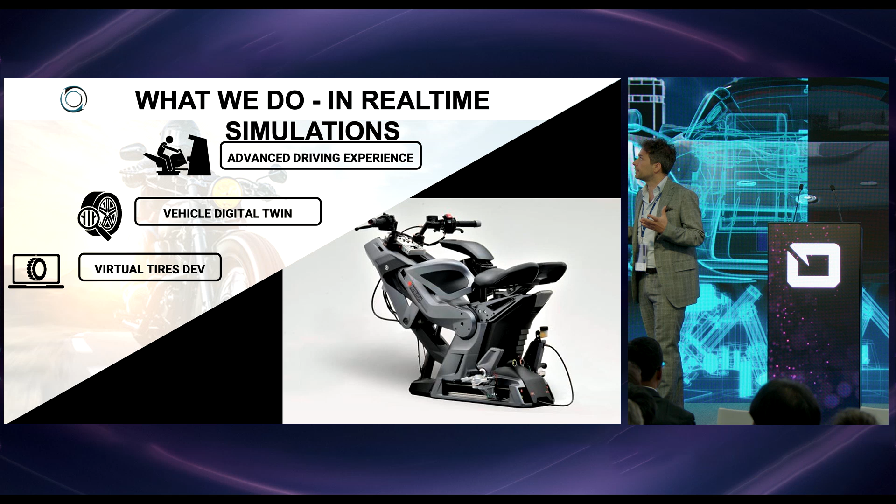We work a lot with this kind of advanced driving experience, working on the vehicle and the tire, in particular digital twin and virtual tire development. And we are really deeply involved in motorsport, where we work on tire analysis to optimize strategies and to identify the optimal temperature and wear ranges in which to optimize the tires.

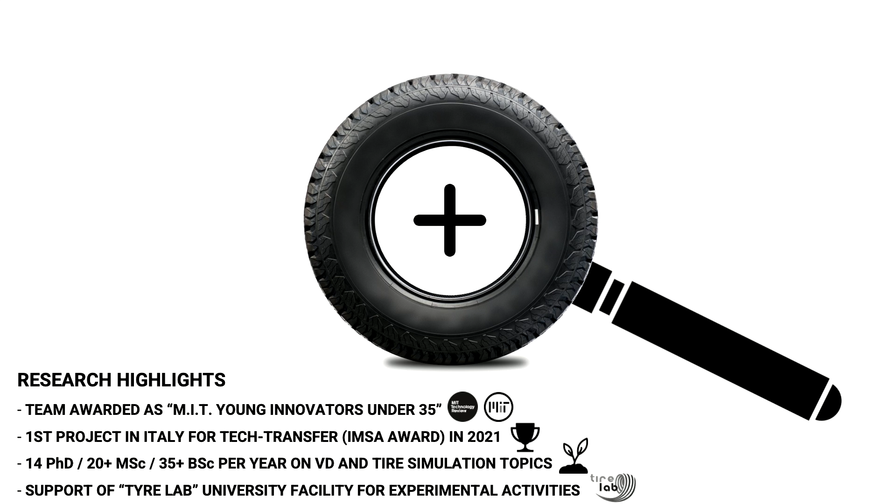Some very quick highlights on the group. We were awarded as Innovators Under 35 - I'm not anymore under 35, but our group is averagely 31 years old. We were awarded as the first project in Italy for tech transfer, and we currently have 14 PhD students in the vehicle dynamics group. We carry out more than 20 master theses and 35 bachelor theses every year on pioneering projects, and we have the support of our facility, which we call the Tire Lab at our university.

The company Megaride was born in 2016. We were awarded Tire Technology of the Year and Vehicle Dynamics Development of the Year by Tire Technology International and Vehicle Dynamics International. Our team is growing, we're about 45, and we became a sort of tech holding group because there was first of all Megaride, and now we have four spin-off companies which converged inside the Megaride holding group.

We currently work with half of the Formula One teams, with 2 MotoGP, Moto2, and Superbike, so we are currently involved in the motorcycle environment. This presentation will be on a project we had with one of the teams we worked with in MotoGP. We had an exclusivity with Ducati Corse several years ago, and we developed the things I'm going to introduce you today, which were evolved further in the last years.

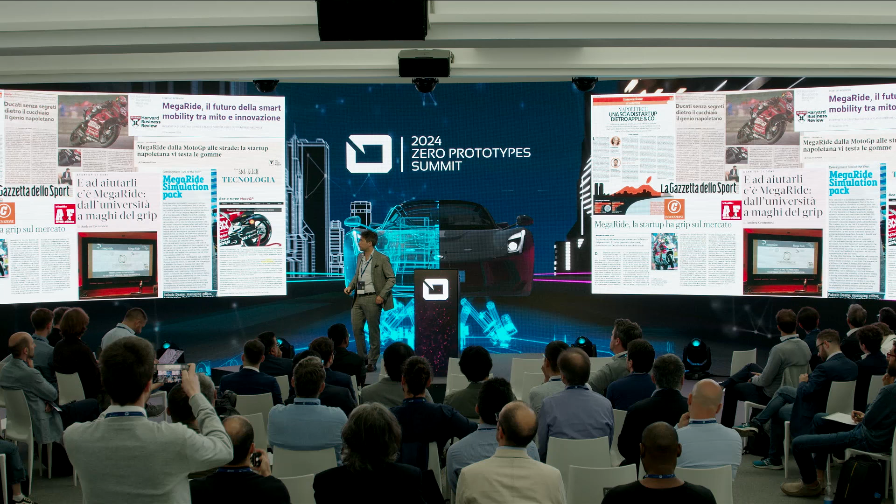Why are we here today? Because I would like to talk to you about what we do with our vehicle dynamics group in the two-wheeled vehicles field, regarding multi-physical models concerning ride, comfort, handling, and tire-road interaction phenomena, and mainly on the identification of the parameters.

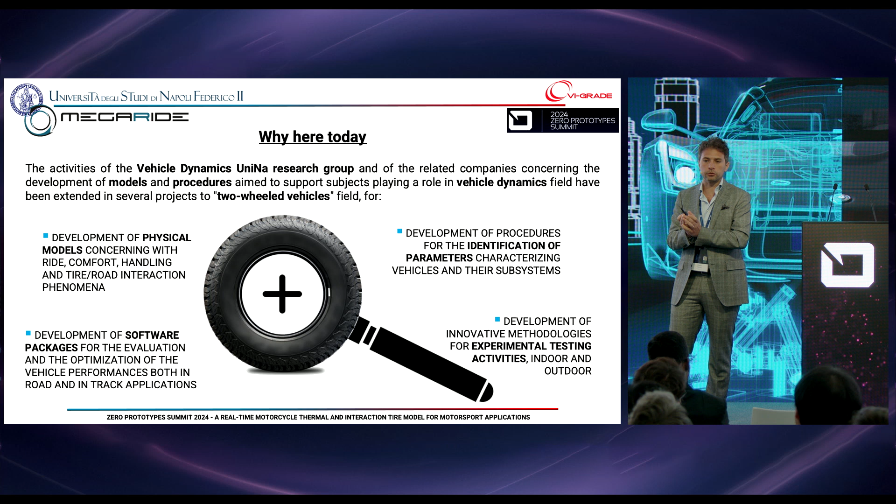We don't just develop the models, but we develop the procedures to identify the parameters of these models, which is very important, mainly in motorsport, because usually the tire manufacturers don't like it much when you cut their tires, so we need to find a way to get that kind of parameters.

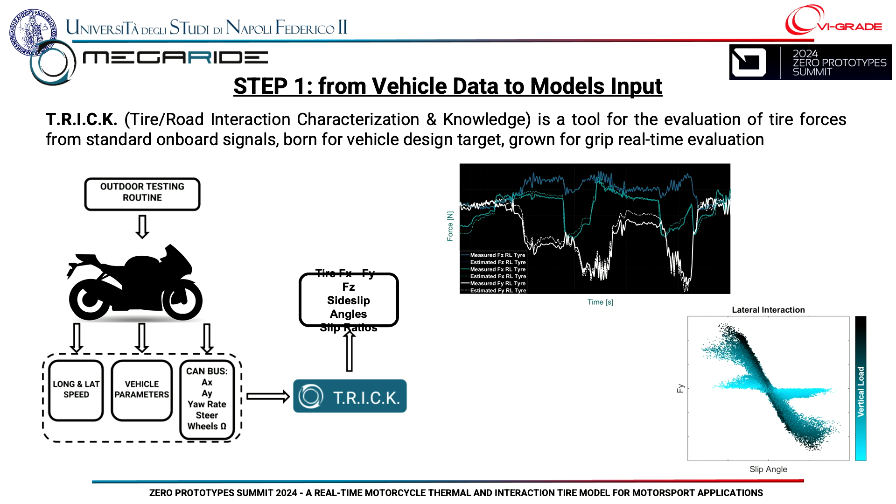First step, we need to get the input for the models from the motorcycle in some way. We developed mainly for cars, but currently also for bikes, a procedure we call TRICK, which means Tire Road Interaction Characterization and Knowledge - taking the data from the vehicle as a sort of moving lab. So we take specifically an outdoor testing routine.

We acquire the longitudinal and lateral speed. Of course, we need some basic vehicle parameters of the bike, and from the CAN bus or any other kind of acquisition system, the longitudinal and lateral acceleration, the yaw rate, the steering angle, and the wheel's angular speed. After that, we're able to process the X, Y, and Z tire road interaction forces, the side slip angle, and the slip ratios of the bike.

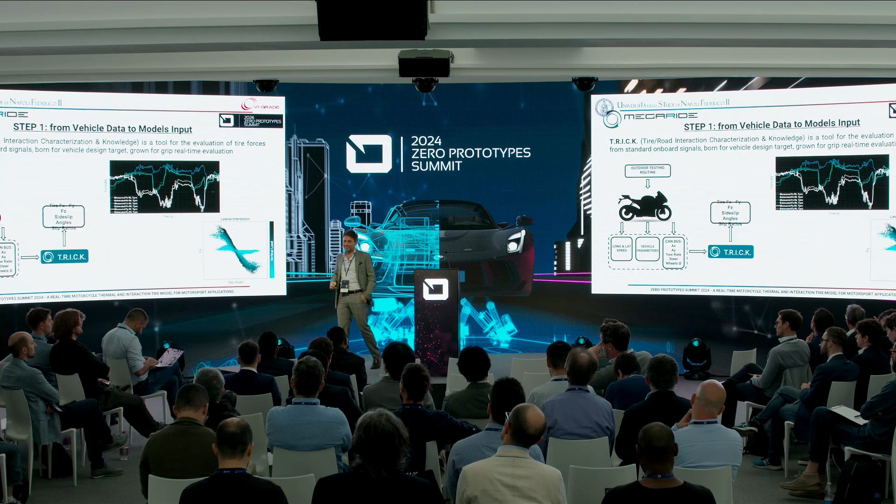In this step, we have the possibility to get the data from the vehicle, process them through this specific procedure, and get the information that is the input for our thermal model. In particular, the model uses the tire tangential forces, vertical forces, slip angle, slip ratio, camber angle, and wheel speed.

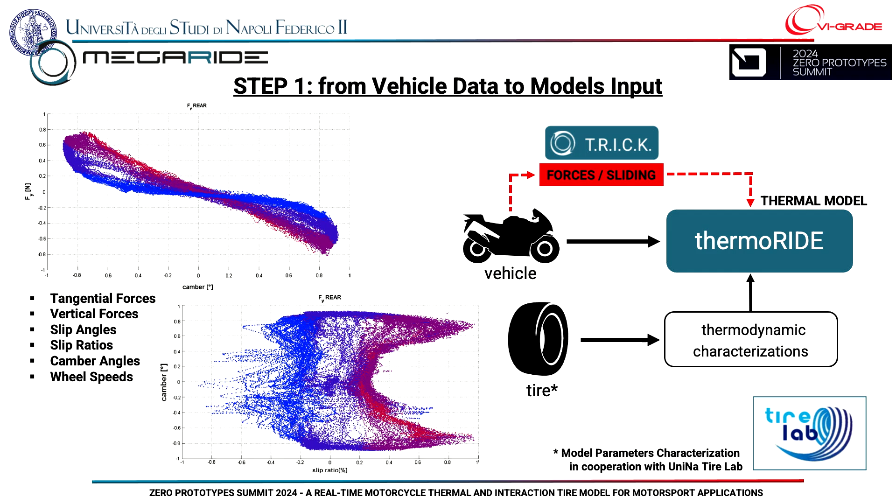These are the basics. How do we do that, and what's the target? We want a tire thermal model, first of all, because we want to have available the thermal info on the inner layer of the tire, which is not usually measurable.

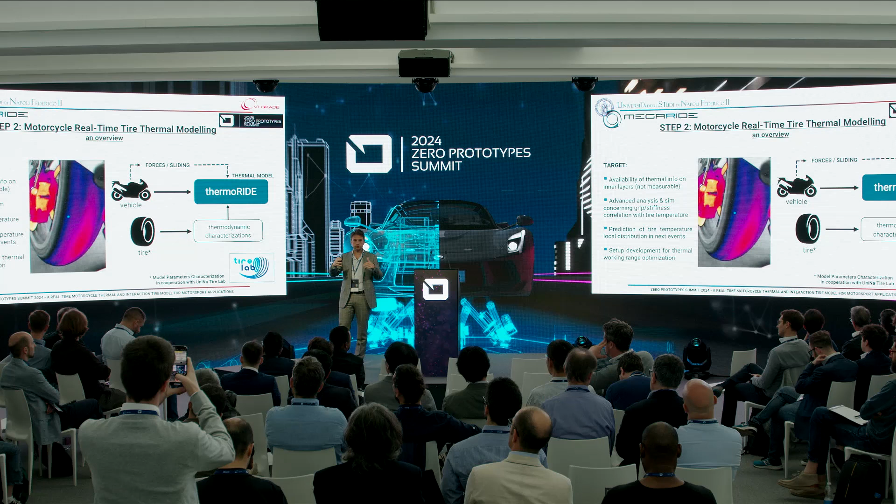We want advanced analysis and simulation concerning the relationship between grip and stiffness with temperature. We want to predict the tire temperature local distribution in the motorsport events we are going to prepare, and we want to develop the proper setup of the bike with respect to thermal and wear working range optimization. How is the model structured? Step 2.

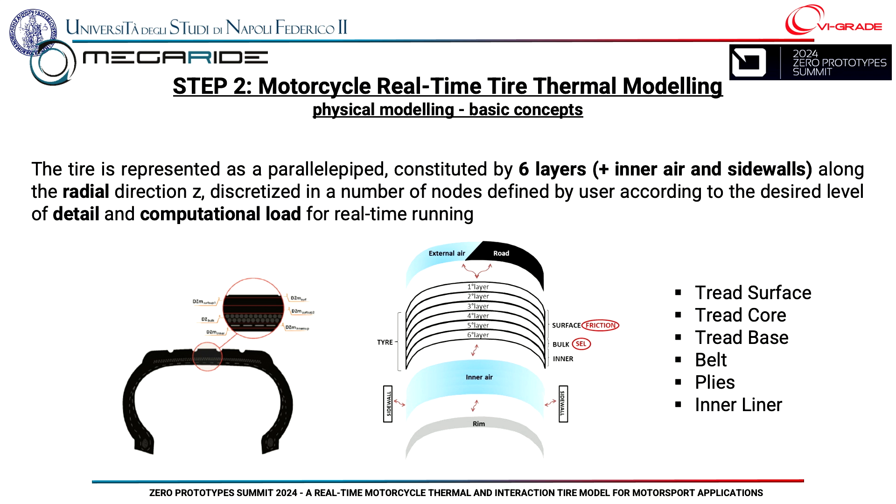The model basically takes into account about 6 different layers: tread surface, tread core, tread base, the belt, the plies, the inner liner. We also have a model which takes into account the inner layer, inner air dynamics, and the sidewall dynamics.

Everything is conceived to be hard real time. Everything I'm talking to you about works in real time. It's up to 16 different ribs in lateral direction, because working with MotoGP, we go up to 65 camber angles, so we need to take into account very locally how things work on the different ribs. So it's 8 different layers in radial direction and 16 in lateral direction.

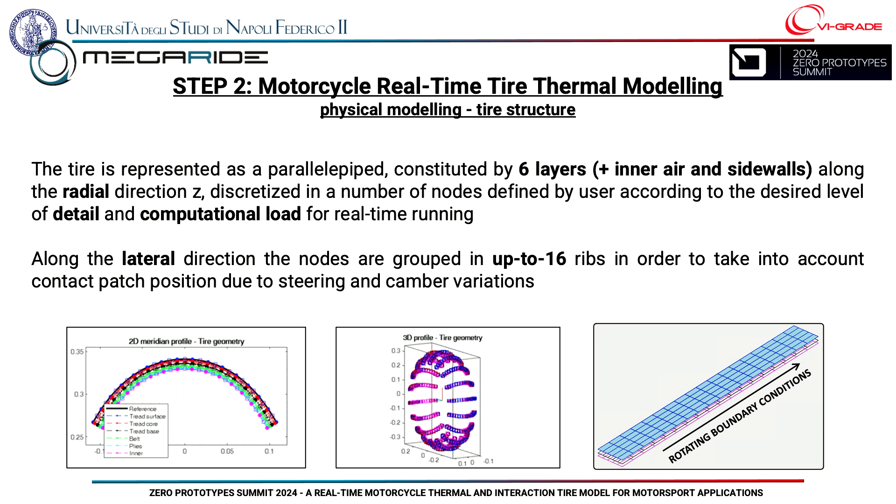Which ones are the main heat generation and heat exchanges we take into account? About heat generation, the tire usually heats up from the tangential force in the adherence and sliding area, which we call friction power. Also, the tire heats up because of strain energy loss effects, due to cyclic deformation, for hysteretic losses.

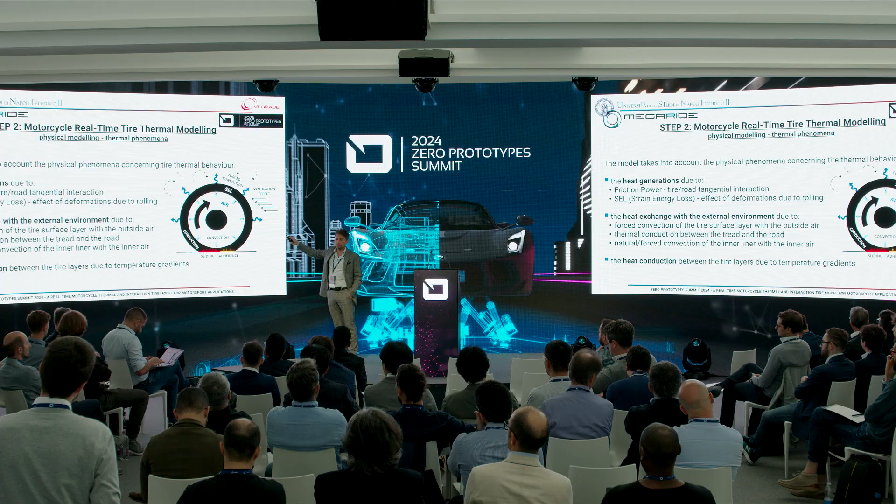The heat exchanges we need to model inside the model are the forced convection of the tire surface layer with the outside air, the thermal conduction between the tread and the road, and the natural or forced convection inside the inflation chamber. Of course, we need to take into account the heat conduction between the different tire layers as a thermodynamic system.

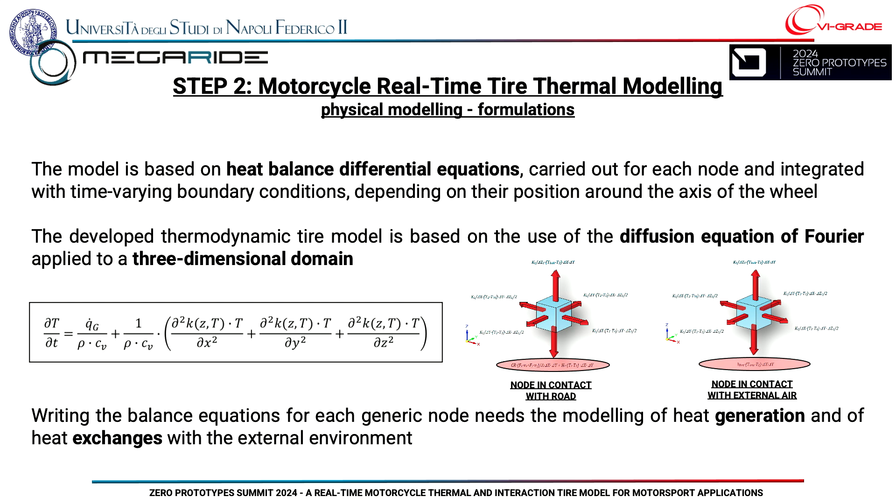Inside the model, the formulation is the implementation of the 3-dimensional Fourier equation in a 3-dimensional domain in real time. So everything is analytic, everything is conceived and coded in C code in order to be very lightly real time. Let's move to step 3.

Once we develop the model, one of the main things is getting the parameters of the models. We split them into 2 families: the thermal parameters and the structural parameters.

When we talk about thermal, we talk about the conductivity and the specific heat of all the different materials in each different layer of the tires. When we talk about structural, we need to take into account the strain energy loss I mentioned, and the measurement of the contact patch areas.

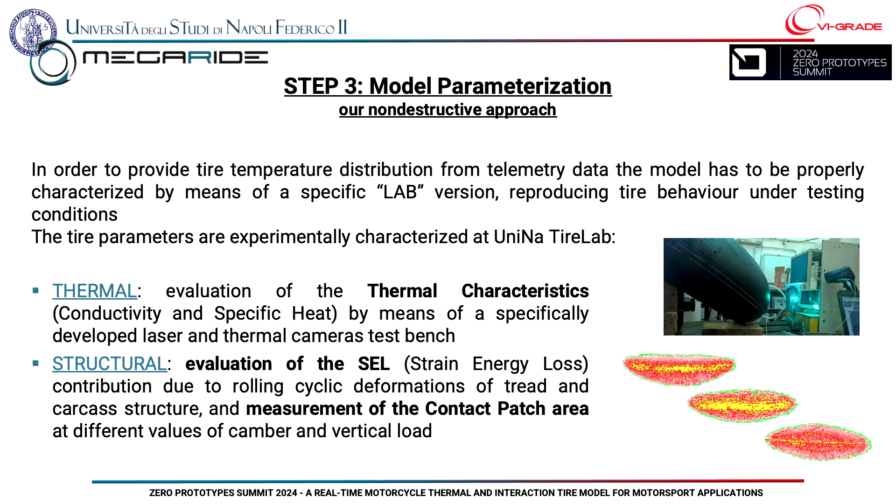First step, thermal parameters. Once again, we work a lot with motorsport. We needed to identify a way which was completely non-destructive. We cannot cut the tire, and the tire manufacturer does not like to see tires that have been touched too much. So the idea was a laser beam that affects the tire from outside at different thermal powers.

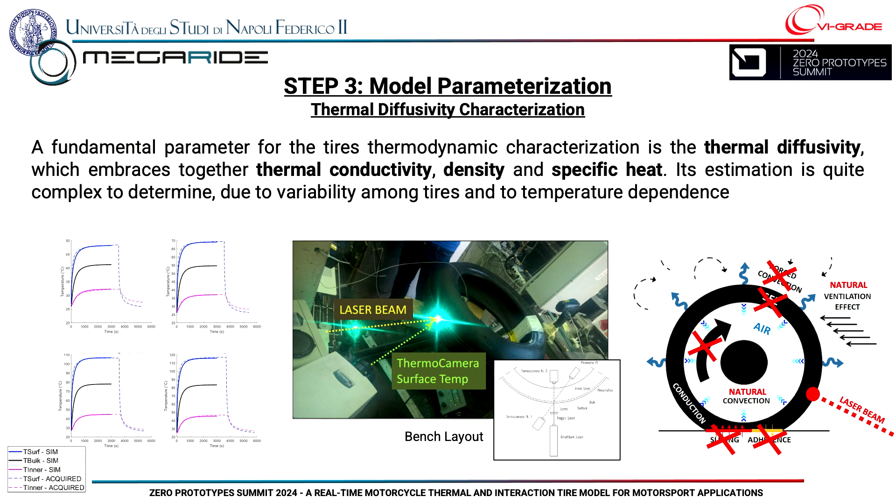We re-implement that kind of setup inside our model. It's static, so we need to cancel the convection with outside. We don't have cyclic deformation, so we cancel the strain energy loss. We don't have the turbulence in the inflation area or chamber, and we don't have the sliding and adherence area. Of course, we need to add the laser beam which comes from outside. So we reproduce that kind of situation.

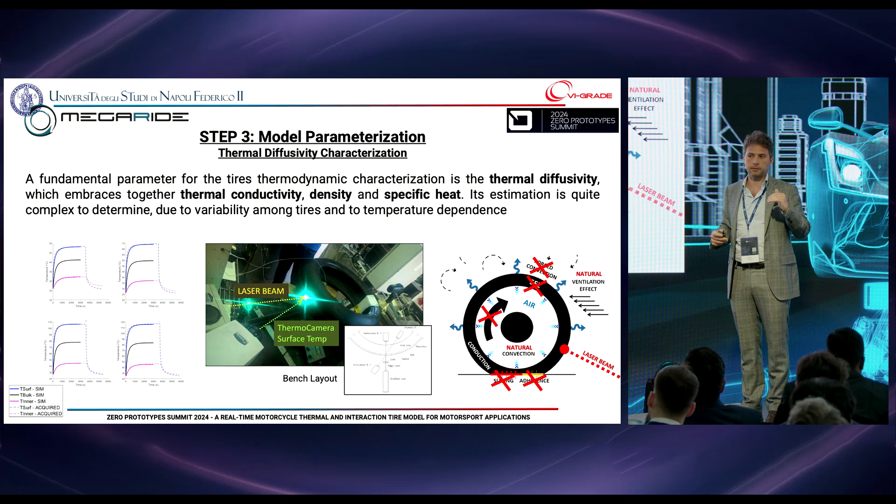We let run the same experimental environment, and we are able to identify the values of the thermal conductivity and of the specific heat of each different layer once the model has reached stability. So it's completely non-destructive.

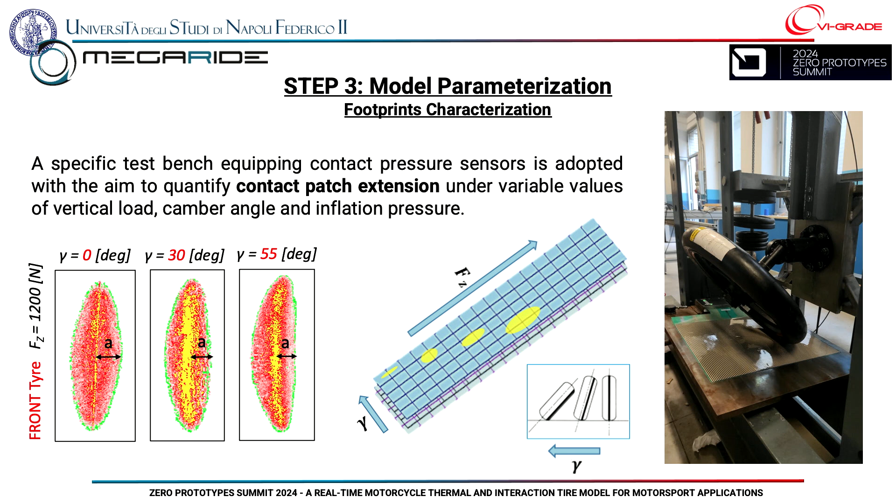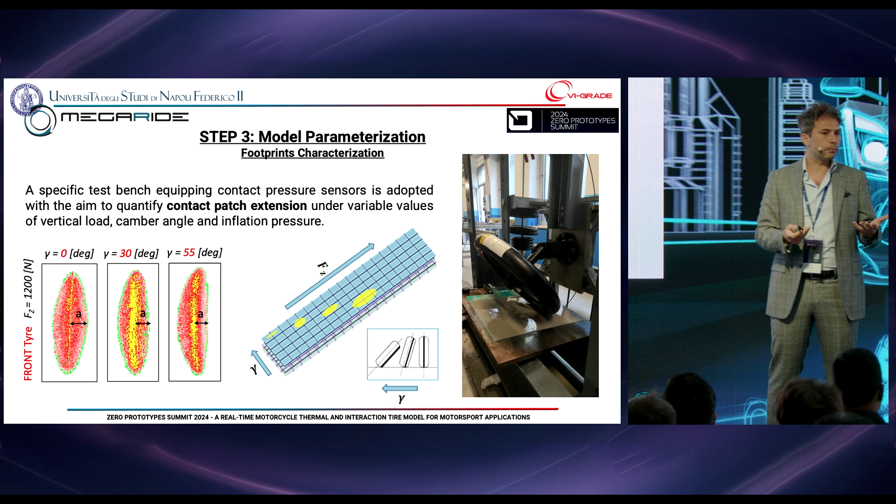Second characterization: at our lab we implemented this kind of bench which allows us to go up to 55 degrees, thanks to a Tekscan bench, to identify the footprint shapes in terms of vertical load, camber angle, and inflation pressure. One of the main difficulties in the thermal model for a bike, compared to a car, is that the footprint moves continuously from one side to the other due to the camber angle. So we have the distribution of the friction power and of the strain energy loss in areas which are completely different at any moment.

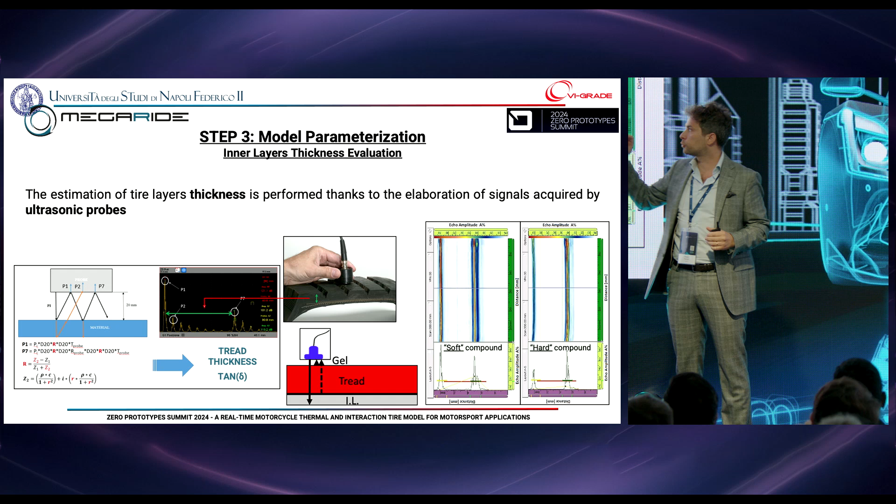One of the nice things we also do, once again for confidential tires, is we need to know the thickness of the tread layer. We do that thanks to ultrasonic probes, which allow us to identify where the cords are set, in order to put the right numbers and right parameters inside the model.

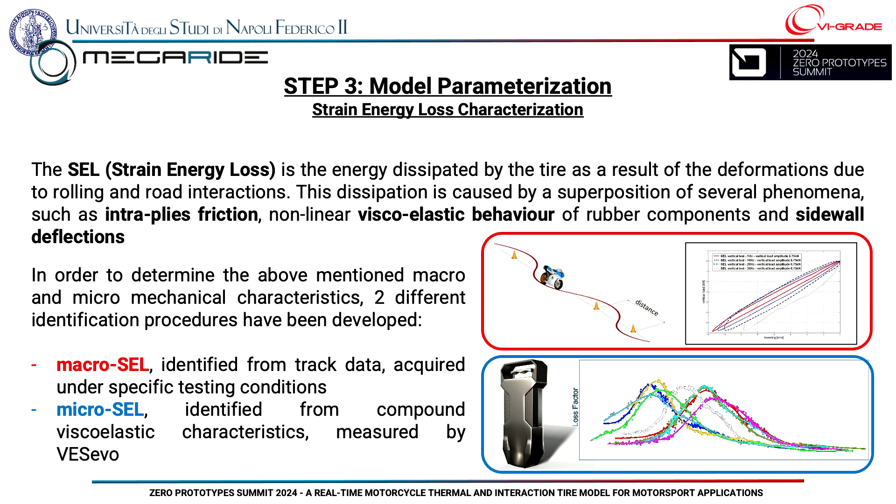The strain energy loss is also very interesting in the motorcycle model, because it's part of two different phenomena. We call the macro-SEL the cyclic deformation mainly concerning the cords and the plies, so the carcass of the tires, which heats up from deformation. But in particular for motorcycle tires, we have a micro-SEL, due to the viscoelasticity of the tire, which interacts with the stones of the asphalt, of the tarmac. This is a very impacting phenomenon for this kind of high-performance tires.

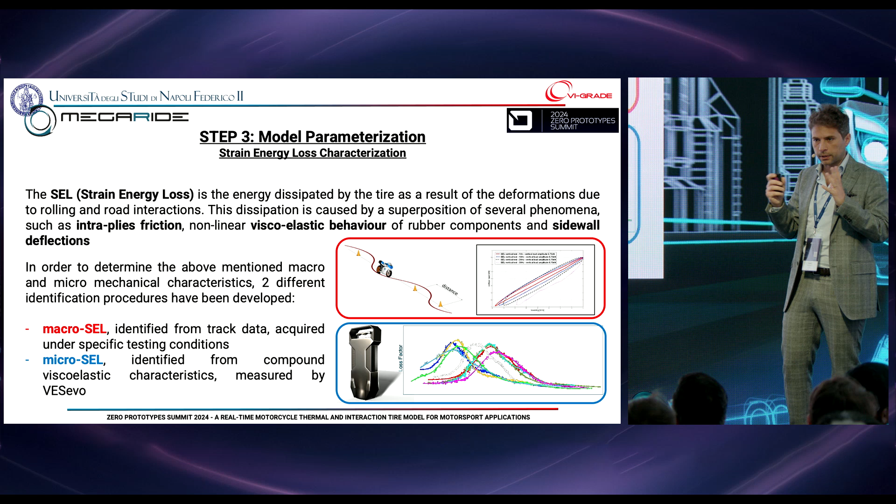We are able to identify the macro-SEL thanks to specific track sessions in which, by performing specific maneuvers, we identify the impact of longitudinal and lateral maneuvers on the heating up of the tires. For the micro-SEL, we developed a specific tool called VESevo. It's a portable DMA, a tool with which we identify the viscoelasticity of the tires with a completely non-destructive methodology. It's also available here, because we have a booth where you can try it yourself.

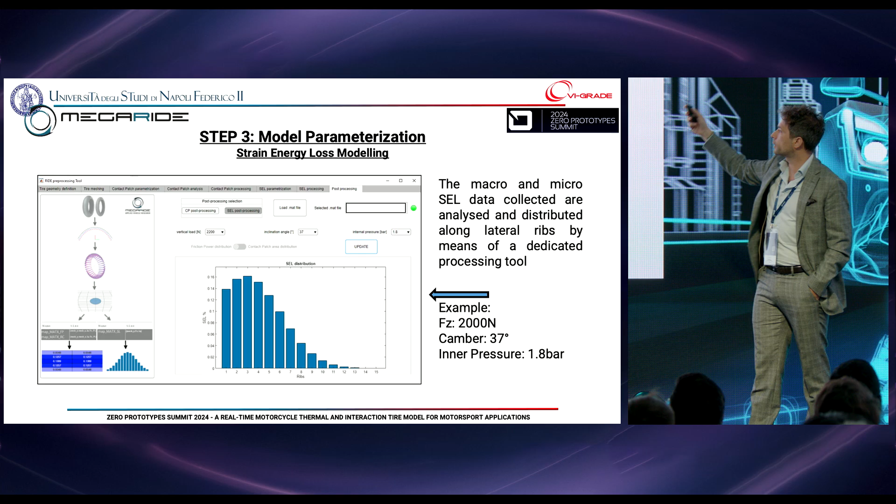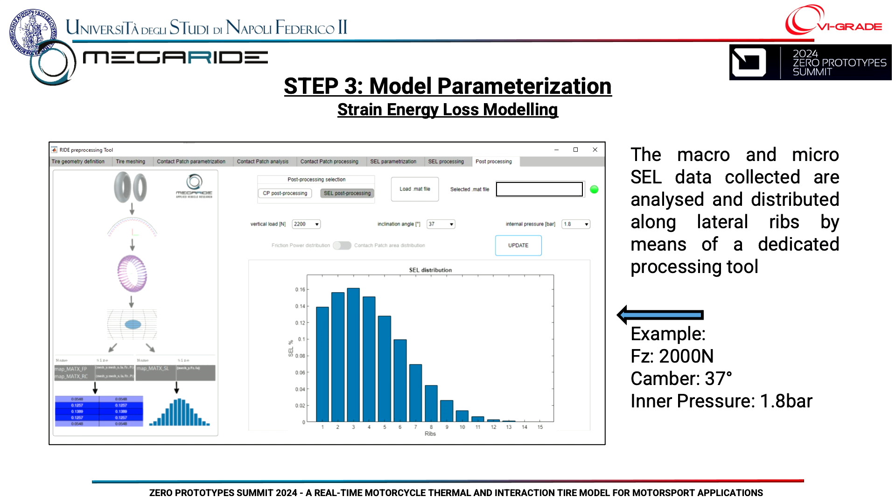Once we get this information, we put inside the model the distribution of the strain energy loss. For example, we have a 2000 Newton load, 37 degrees of camber angle, with an inflation pressure of 1.8 bar. So we know that the strain energy loss is distributed, in this case, on the ribs lying on the side of the camber angle, relative to this vertical load and inflation pressure.

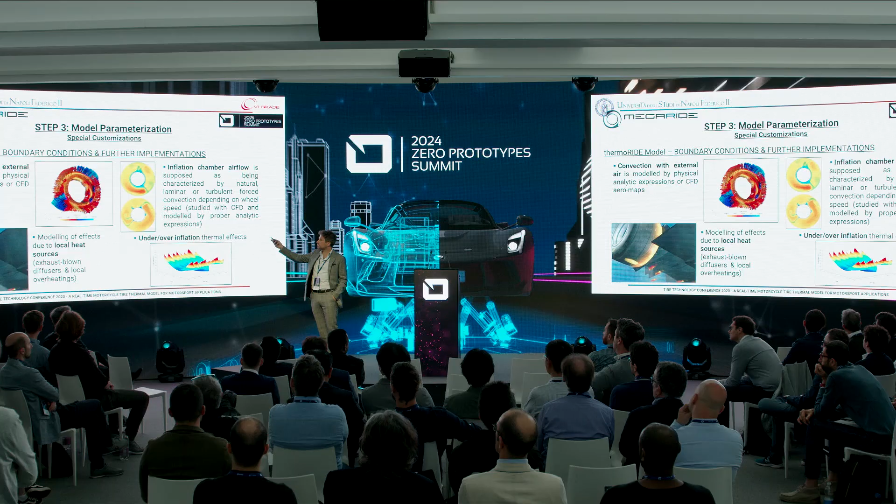This model can be completely customized, so we can work with CFD to identify the impact. For example, if I need to simulate a maneuver where I'm behind my competitor, the energy flux is completely different, so I need to take this into account from the thermodynamic point of view.

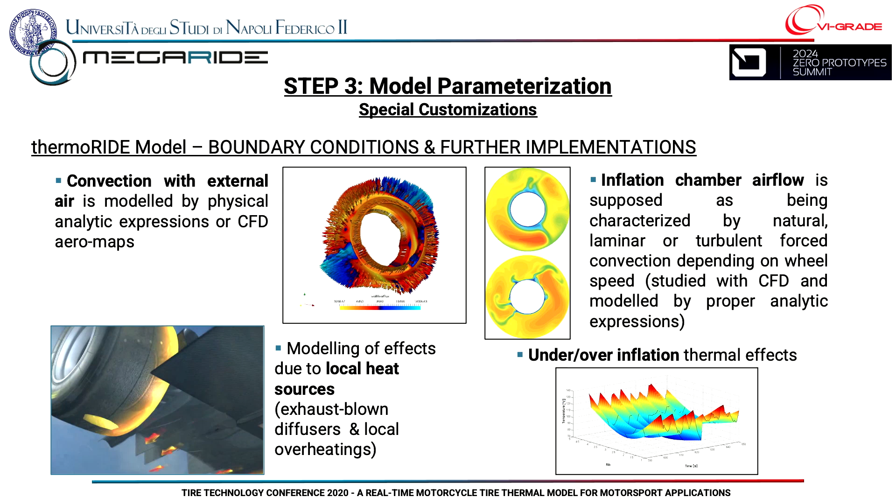We also worked a lot on exhaust blown diffusers for cars, which are also coming out in motorcycles now, studying what happens in the inflation chamber with turbulence. We can also study, for example, the effects of over-inflation, because the behavior of the footprint changes dramatically.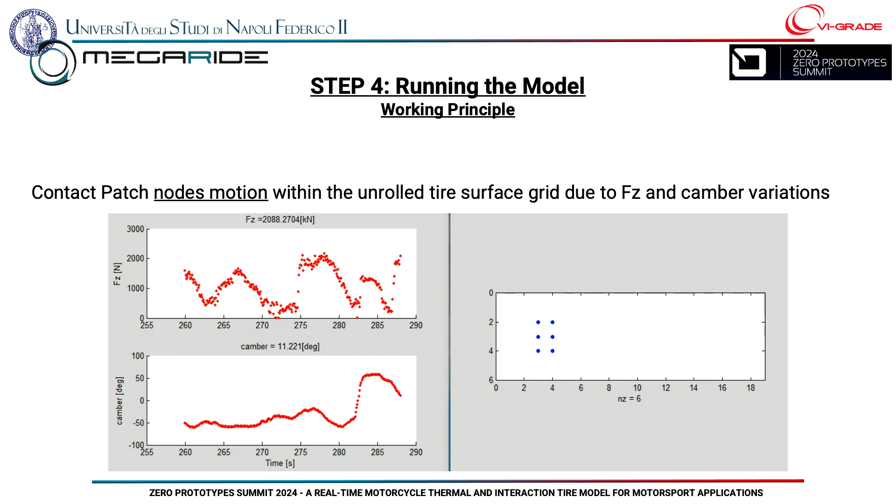Taking into account the camber angle, which moves from 0 to minus 60, and then up to plus 60, the footprint moves from one sidewall to the other sidewall. The volume is considered as the tire cut on top, becoming a rectangular area, so the footprint moves inside these control volumes.

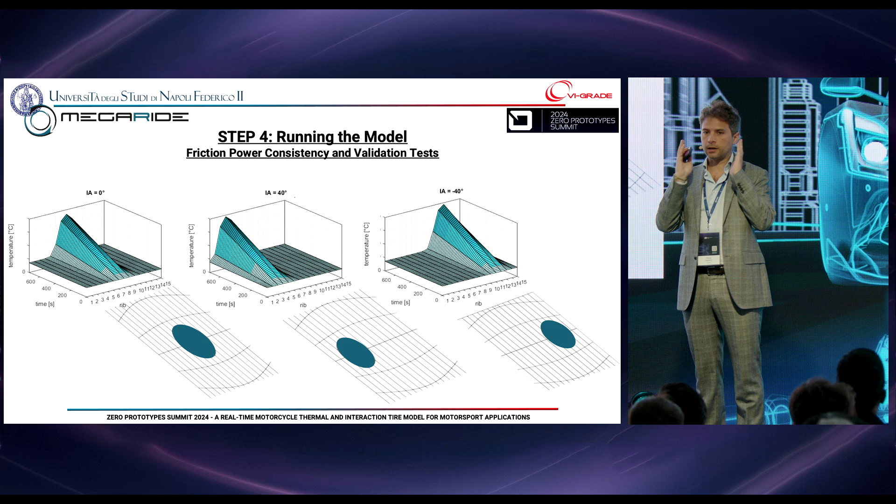Once we run the model, we can observe some nice and interesting things. For example, we can validate the friction powers. If a motorcycle is going straight, we have a central footprint, and so the friction power is observed in the central ribs of the tire. If the footprint moves from one side to the other, this distribution also moves from one side to the other of the volume.

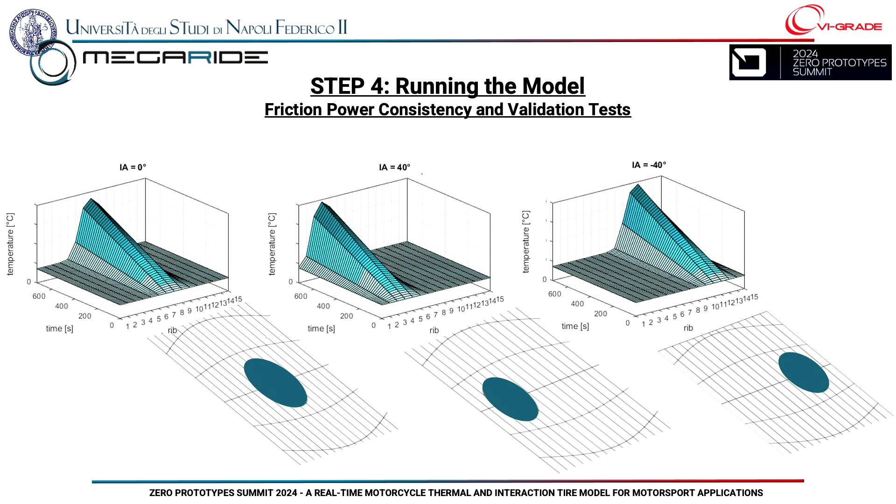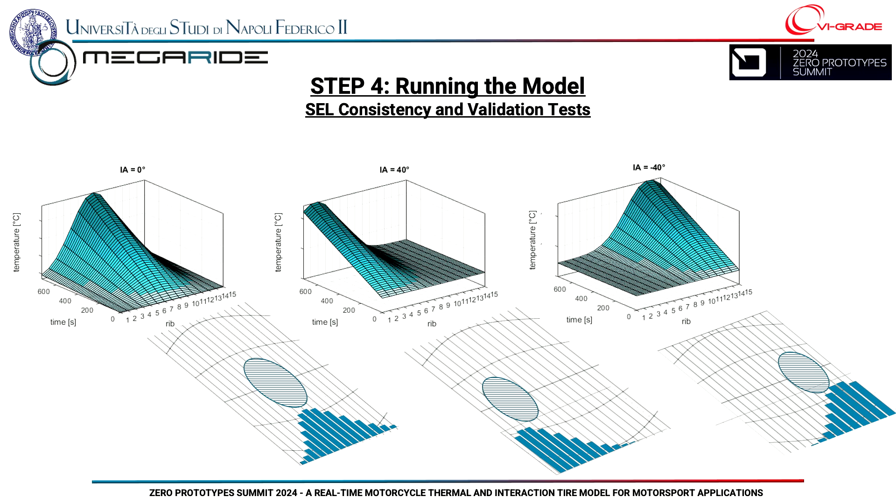The same can be done for the strain energy loss. Once again, the distribution is quite different, but if we are turning, leaning, and cycling the deformation of the tires, we have the distribution of strain energy loss moving from one side to the other, which is summed up with the friction power.

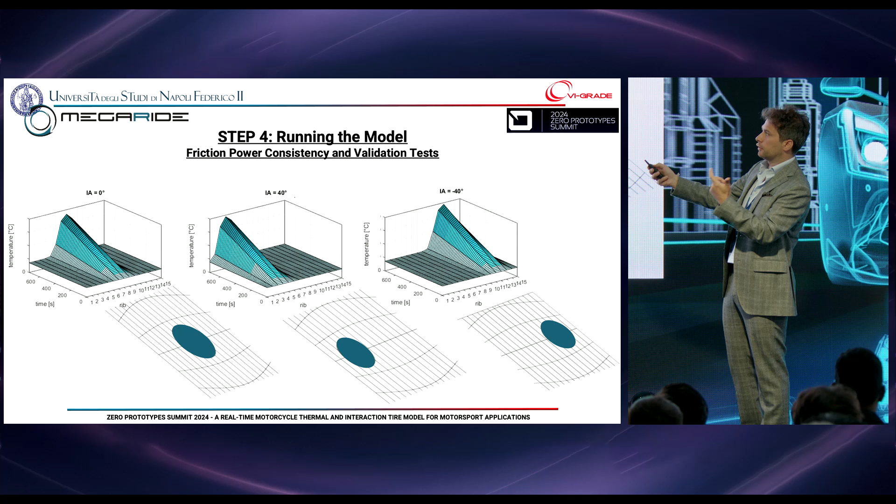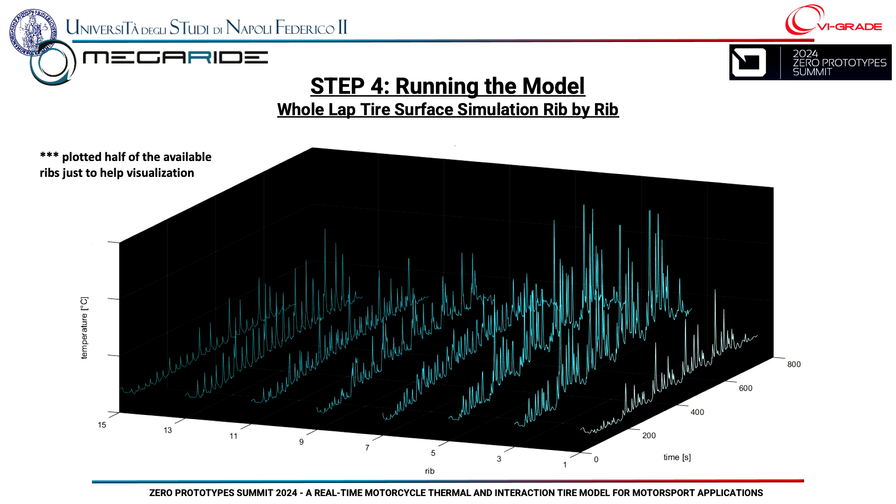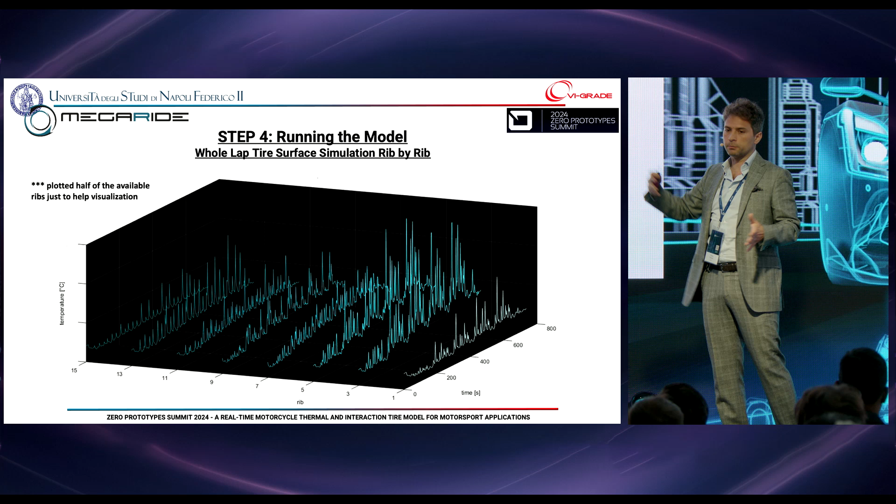This is what the model does. As I told you, there are 15 ribs. Here I'm showing just half, because otherwise it would be a mess to notice these things. But this is the whole telemetry for different laps of a motorcycle across the different ribs of the tire. For example, this was a lap where the tire worked a lot on right side curves, because the right side ribs are at a higher temperature than the left side.

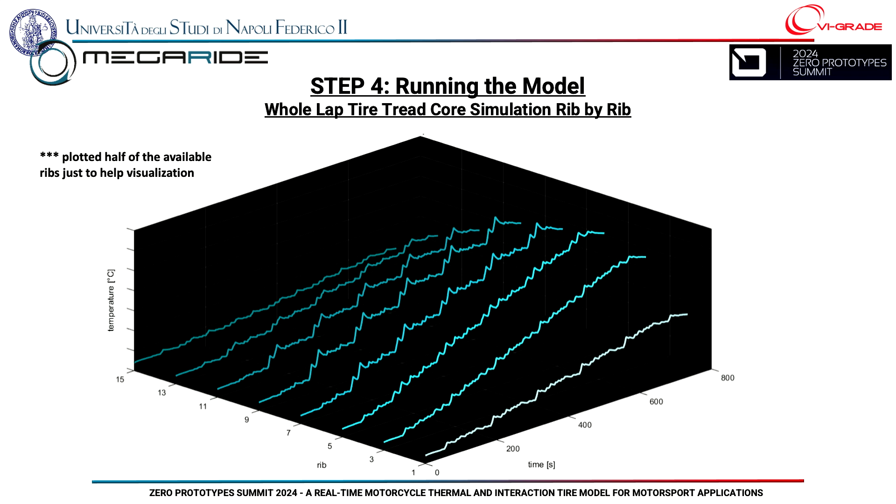This is one of the most important things, because once I have this model, I can get information about the tread core temperature, the temperature inside the tread layer. This is different from the outside temperature, which can usually be measured easily by infrared sensors. The core temperature cannot be reached by any kind of instrument. Why is it important? Let me skip ahead and show you this directly, sorry.

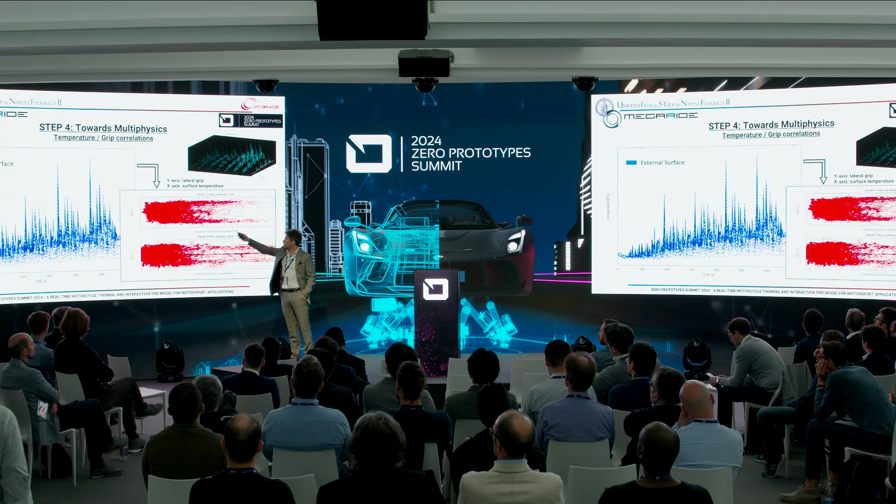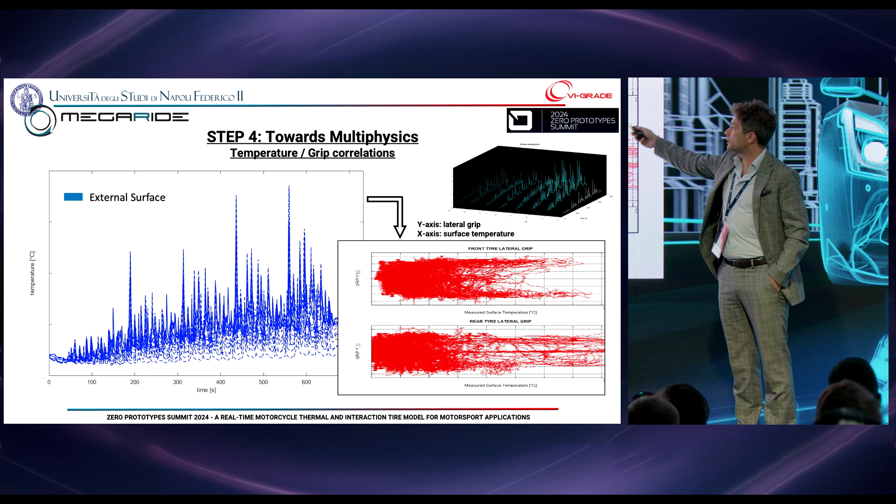If I put on the same diagram the lateral grip, for example for the front or rear tire, against the measured surface temperature, I get a correlation that doesn't tell us much. But if I put on the x-axis not the surface temperature, but the tread core temperature, this diagram becomes one that lets me know exactly the thermal range in which the tire is working at its optimal temperature.

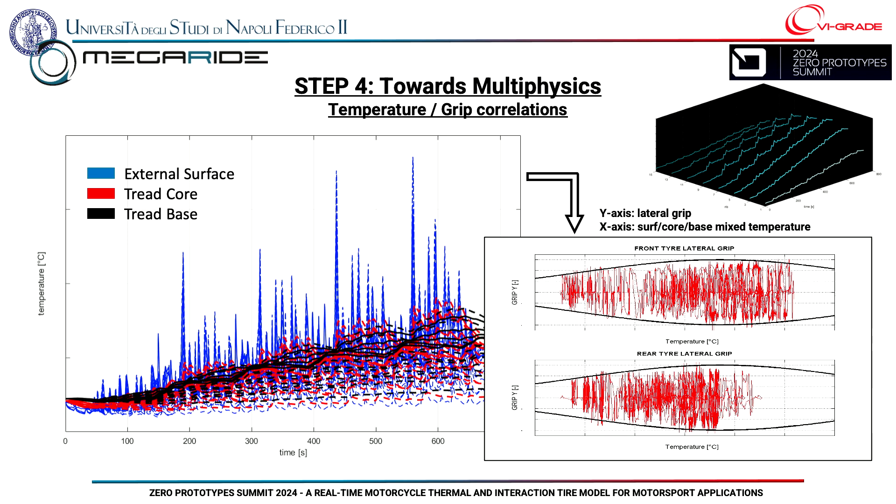So the highest correlation between grip and temperature is the correlation of the tread core layer with the temperature, or the tread core temperature with grip and stiffness.

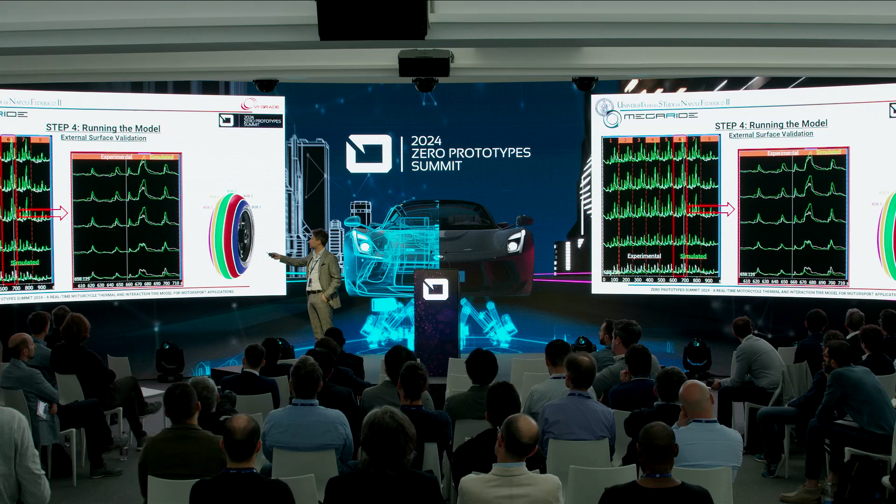Moving back, because the model has been deeply validated. For 5 ribs, for example, you can see what happened comparing the external measured temperature with the model temperature. The interesting thing, again, is the inner liner temperature, experimental and simulated. As you can notice, on the stabilized area, the model performs very well.

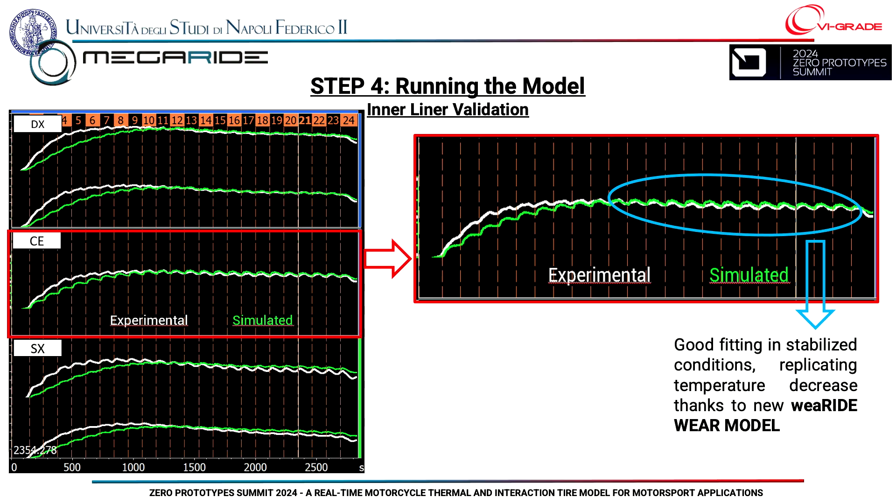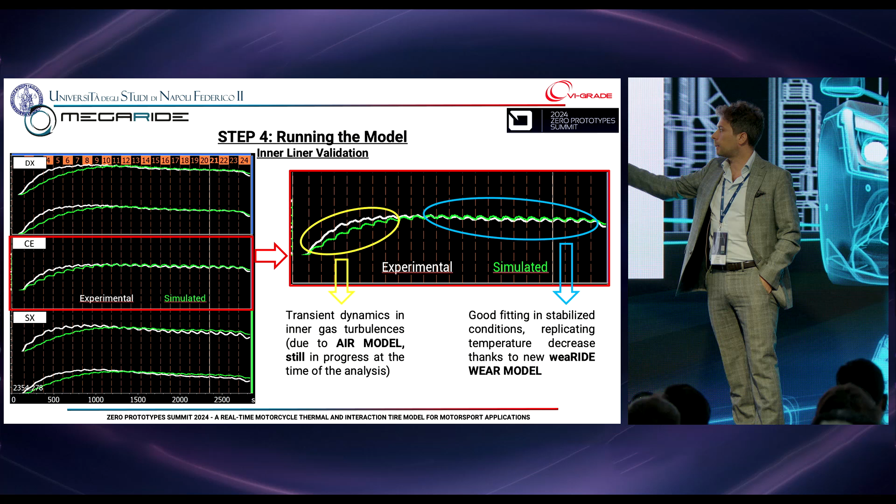This is the result from some years ago, from the old MotoGP version of this model. We were not much able to get the transient dynamics inside the inner liner, but now these things have been deeply overcome thanks to the new air model we put inside the thermal model.

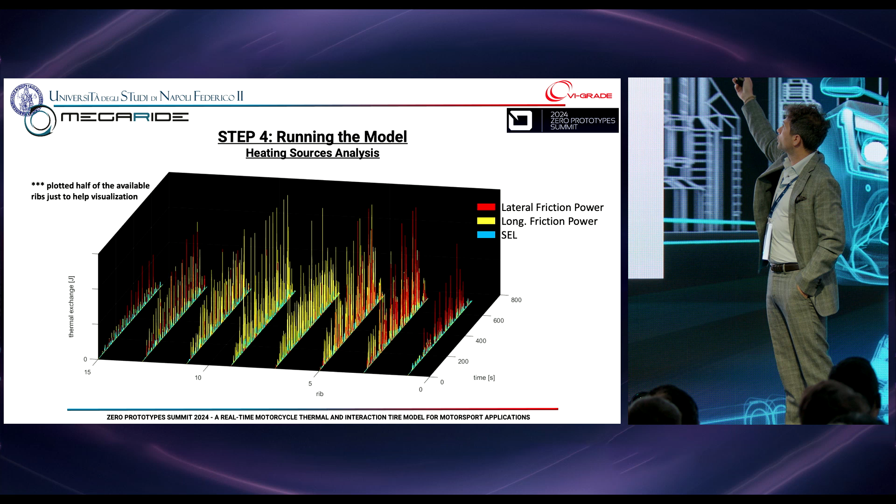What more? We can observe how, for example, the tire is heating up - the lateral friction power, longitudinal friction power, and the strain energy loss. It's very interesting that the lateral ribs are highly affected by lateral friction power because they are the ones engaged when the motorcycle is leaning.

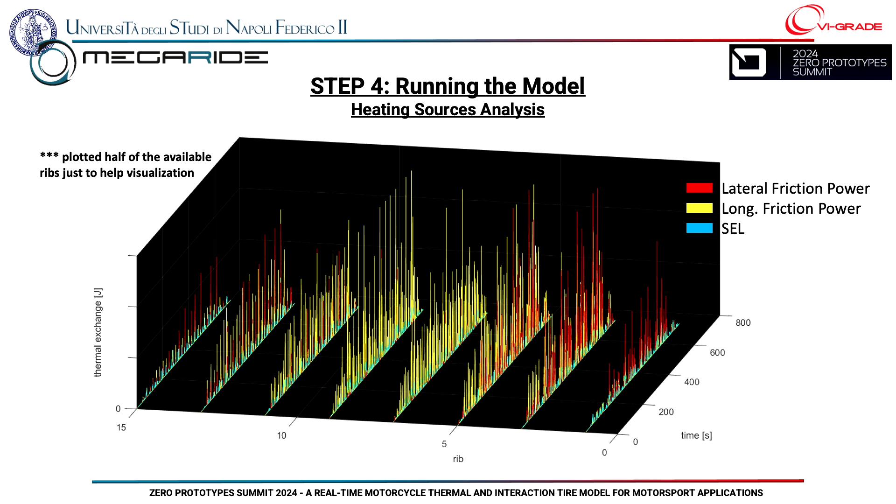On the central ribs, it's everything about longitudinal friction power, because when I give throttle and brake, everything is longitudinal slip. There's also the contribution of the strain energy loss, the blue one, which is a little smaller than the others, but trust me, quite important.

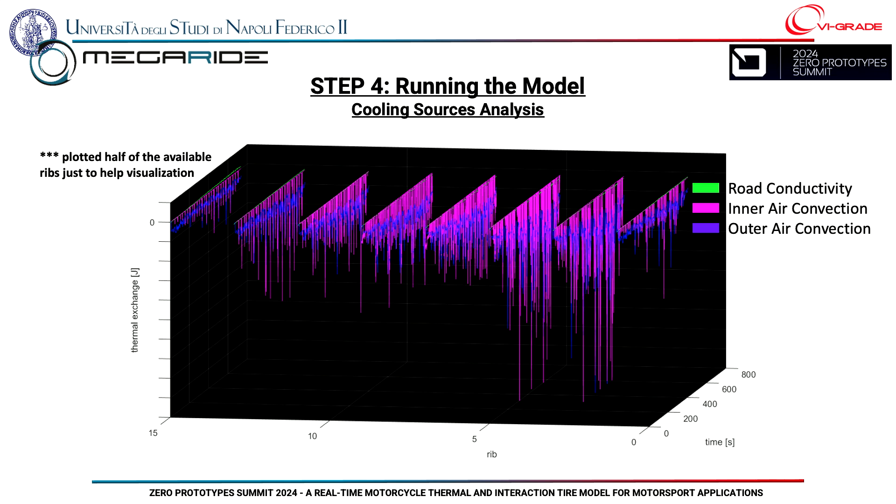The same can be said about the cooling effects. They are mainly the inner air convection and, of course, the outer air convection with the air outside. The conductivity with the road is very negligible, as you can observe.

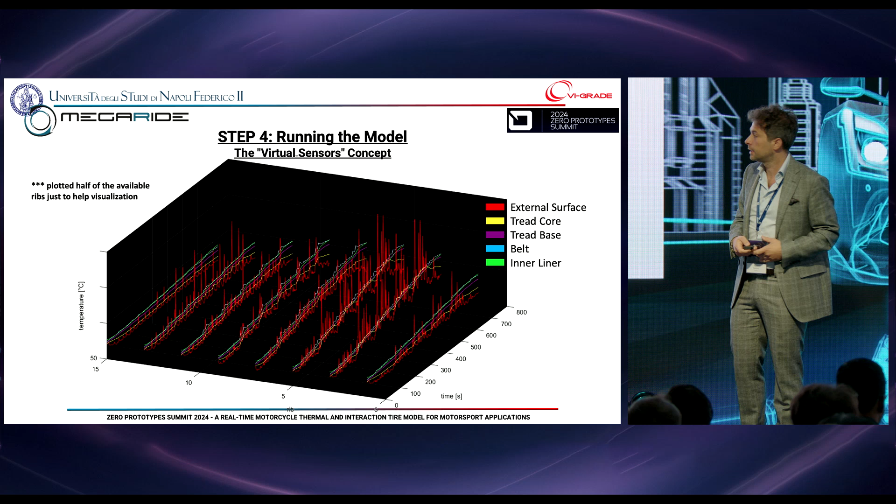And finally, we can put everything together. So for these ribs, we can observe everything at any moment. Of course, it can be simulated on a simulator inside your desktop application for preparing the next event or for tire development. I already showed you this.

Finally, we are moving toward multiphysics. So what's the next point? Once I get a very reliable thermal model, I can put this inside the Pacejka environment. As you well know, Professor Pacejka did a great job a few years ago, but his model just took into account vertical load, side slip angle, slip ratio, and camber angle, not anything more. He was forgetting the temperature and also something related to viscoelasticity and road roughness.

We put these things inside our advanced Pacejka model, we call it adheRIDE, and it's able now to take into account all these kinds of things. So this is, of course, the process.

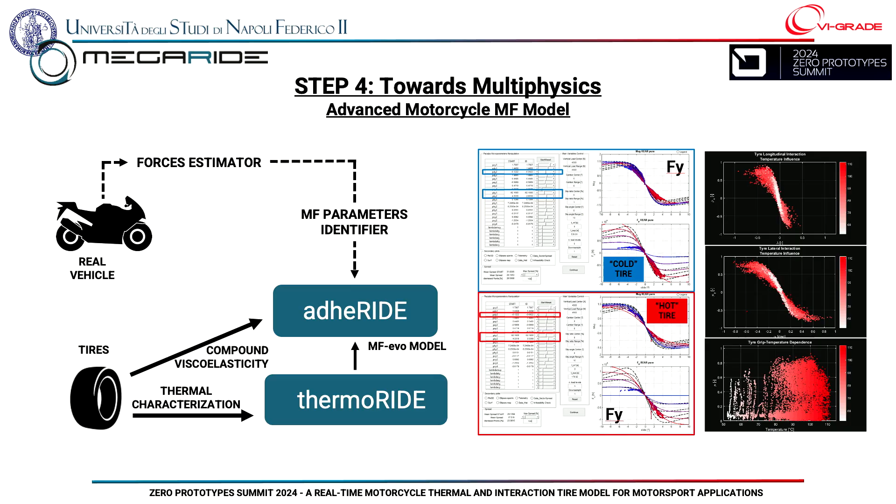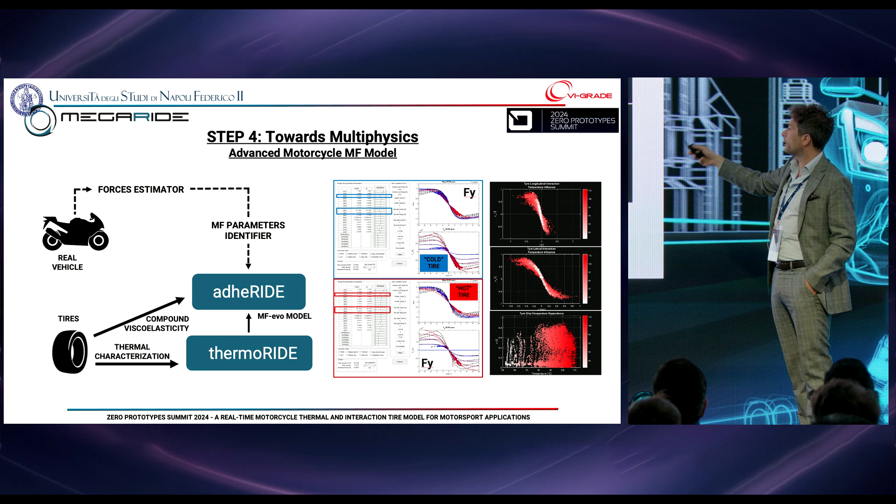We get the data from the vehicle, but it can also be from the trailer or from the flat track bench. We put everything inside the thermal model, and so we finally identify the adheRIDE model, which is able to take into account how the longitudinal, lateral, and grip curves change with temperature - and they change quite dramatically. Everything can be put also, of course, in co-simulation.

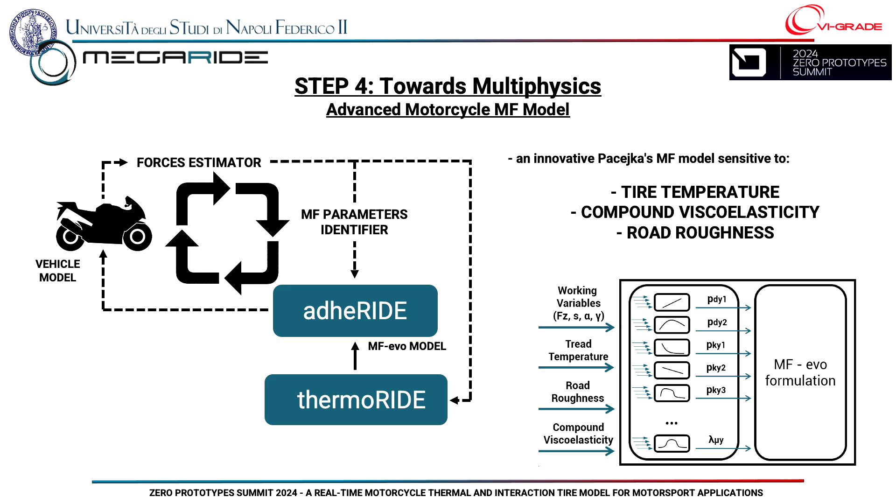It can work in VI bike real time, VI motorcycle, any kind of personal MATLAB model. And what's the secret? We just put functions inside the micro coefficients of the Pacejka model. As you know, the Pacejka model has fixed coefficients. For us, those coefficients just became functions, which are functions of tread temperature, road roughness, and compound viscoelasticity.

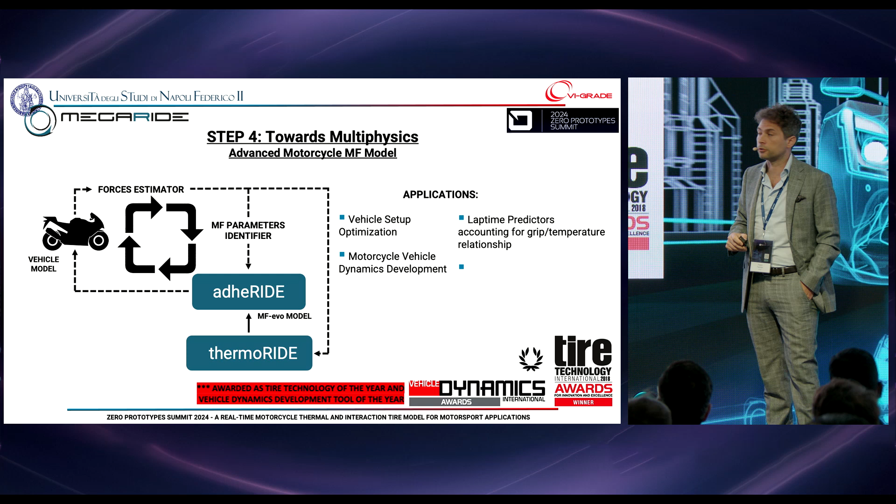The applications could be in vehicle setup optimization, motorcycle vehicle dynamics development, lap time prediction, because this kind of tool also works in real time in VI max perf, for example, or any other similar environment.

And yeah, these are some references, some publications we did. I think the presentation will be shared with everyone, so they could be useful. Thank you, that's all.

Thank you, Flavio. So who is volunteering to do a short summary of his presentation? No, really good, very good work. Sorry, thanks for this. We don't have time, we have 1 minute. One question.

For the thermal conductivity evaluation, yes. It's quite simple. We put the tire on the bench, we put the laser beam, we heat up that spot at different powers - 1, 2, and 3 watts, so it doesn't smoke. We identify the temperature during the heat up and also the cooling down phase once we shut off the laser. We resimulate that kind of environment inside our model, changing millions of times the values of the conductivity and specific heat of the different layers. The model is able to replicate the empirical condition once the real value of the conductivity and specific heat have been reached through this iterative identification process.